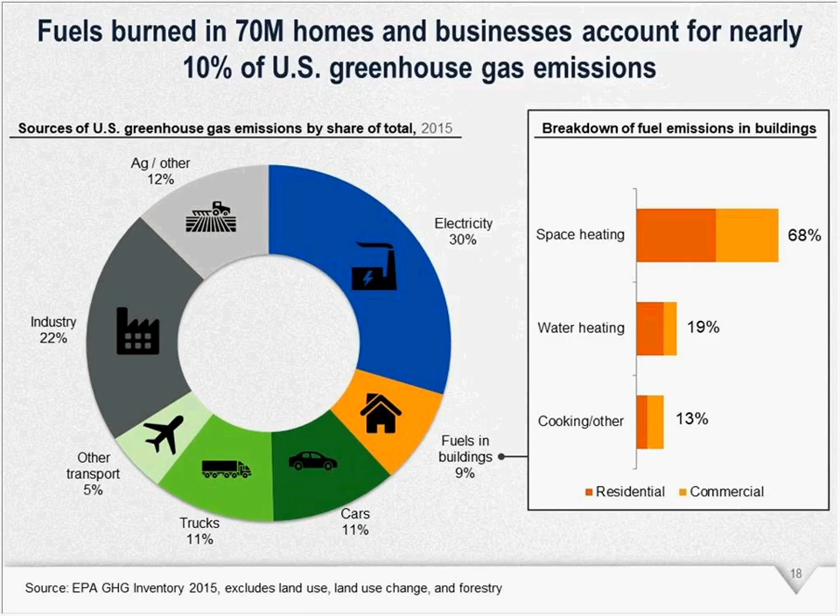So we wanted to investigate this hypothesis: that efficient buildings could power all of these end uses with low carbon electricity and eliminate fossil fuel use in buildings, along with the emissions and indoor air quality and safety issues that go with burning fuels in buildings. And secondly, that these end uses can be interactive with the electric grid and can balance wind and solar power, which are variable resources.

So we launched this report with the big question of how do we decarbonize buildings, and should we pursue this path? Should we, as a nation, states, or cities, be switching people and businesses from natural gas, oil, or propane to electricity? Does that actually make sense?

We had heard a couple of assertions that gas is always cheaper, or that it's better to burn gas at the point of use rather than burn it at a power plant and transmit it over the wires. So we wanted to investigate that.

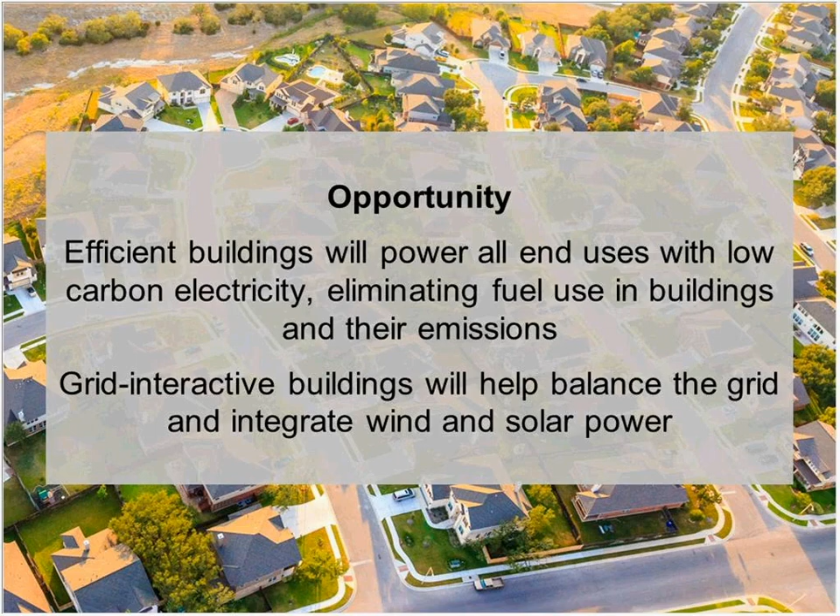So the scope of this report asks a couple main questions: does electrification reduce or increase carbon emissions today, with the grid we have, the electric system we have today? And does it reduce or increase long-term cost?

We'll talk about the mix of what we looked at in a moment, but it was limited to single-family homes with ducted heating and air conditioning. We did not include multifamily or commercial buildings, other heating systems without ducting, ground source heat pumps, or renewable gas.

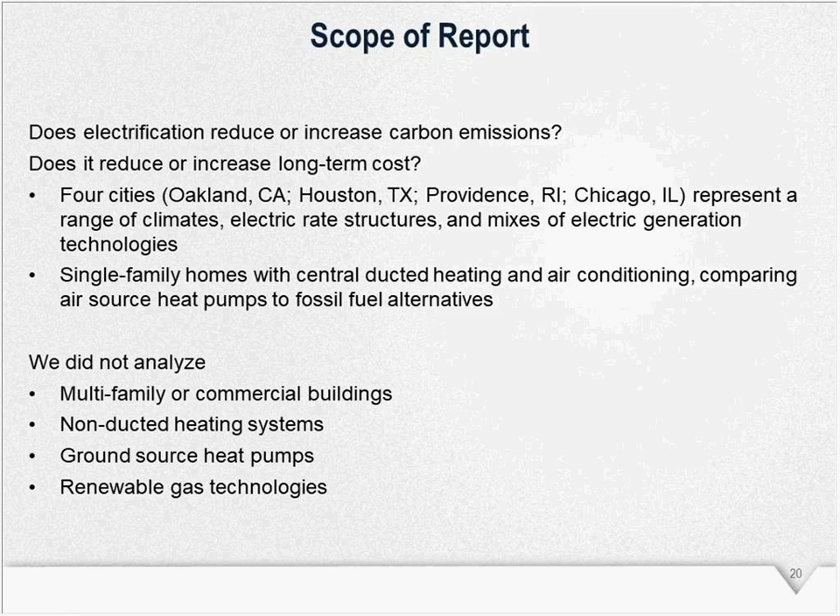But we did look across these variables: geography, 4 cities — Chicago, Oakland, Houston, and Providence. These were selected to give a mix of climate types, electricity pricing and gas pricing, and how customers are charged for those things.

We looked at new construction and retrofit. The new construction homes represent a much higher degree of efficiency than the retrofit homes, which would be more of an average or medium performing building.

We did investigate a variety of electricity rates and tried to identify creative tactics we could use to optimize for those rates. Can we preheat the water when electricity is cheap, for instance?

We considered whether a customer was replacing only a furnace, or whether they could get kind of a 2-for-1 benefit, where both their air conditioner and furnace were at end of life and would be replaced with one air source heat pump. And then we looked at a few different fuels: electricity, gas, propane, and oil.

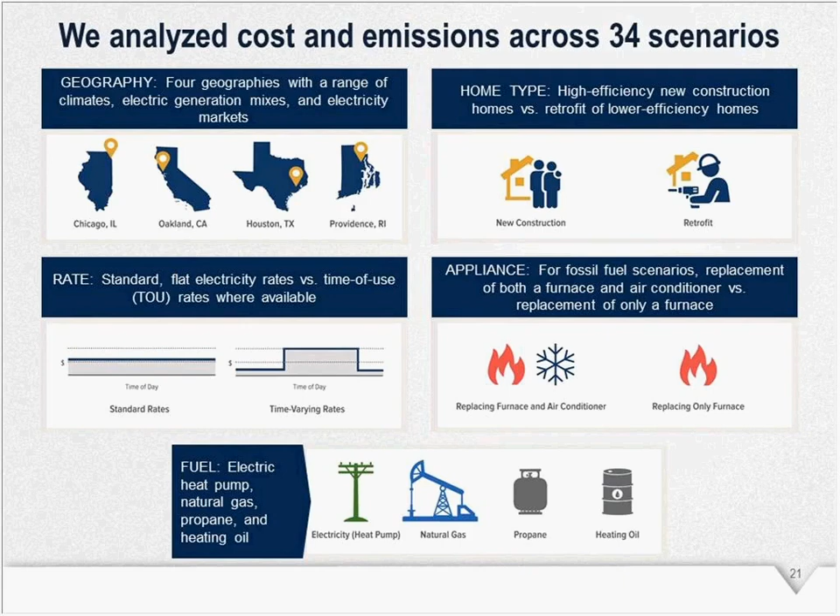So let's dive in a little more. Okay, last point on methodology — we did use EnergyPlus as our modeling software for the carbon emissions associated with electricity.

We used marginal emissions data on a 5-minute increment for the entire year in that city — what power plant is turning up or down just a little bit to accommodate more or less electricity. So it's very granular in terms of which power sources are actually responsible for meeting additional load. And we did use heat pumps that meet the cold climate certification.

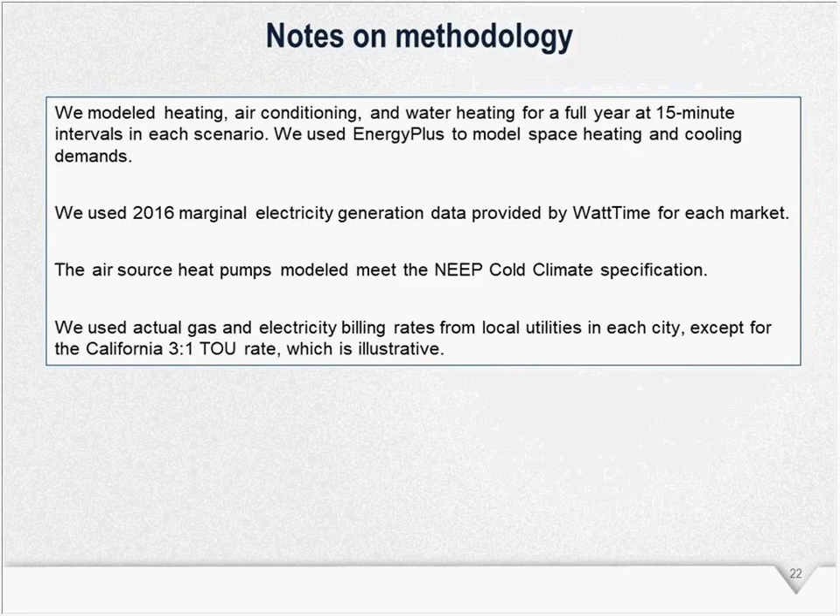I'm going to dive into the highlights here, and then we'll dive into some city-by-city results and talk about how the numbers shook out.

So the first point is: is it cost effective? We found kind of a mix, but we found the answer is yes in several situations. Pretty much all of the new construction situations came out as cost effective under our analysis.

There's a couple reasons for this. One is that you get a bit of a 2-for-1 benefit — you're installing one air source heat pump instead of both an air conditioner and a furnace. And you save a little bit on natural gas infrastructure in the building, and you could save a lot on avoiding the underground gas infrastructure that serves the home itself.

Also, the new construction buildings are much more efficient and are a better match for air source heat pumps, including in colder climates, than the less efficient buildings are.

The oil and propane scenarios we only looked at in New England, because we know oil in particular is common there, but it is relatively cost effective to electrify those customers under our analysis, considering they do not have gas service already, so natural gas is not an option for them.

Some of the existing natural gas customers are the hardest to convert from a cost point of view, because they're already served by natural gas. But if the air conditioner and furnace are both at end of life, they could swap them out at the same time for one air source heat pump and come out ahead. It becomes harder to do on a proactive basis if they wouldn't otherwise be replacing those devices. We'll get into the electricity rates next.

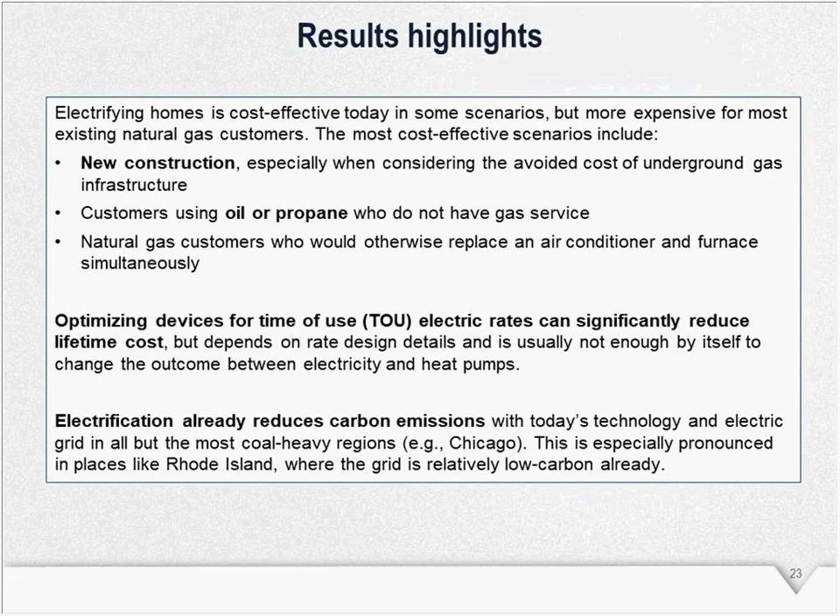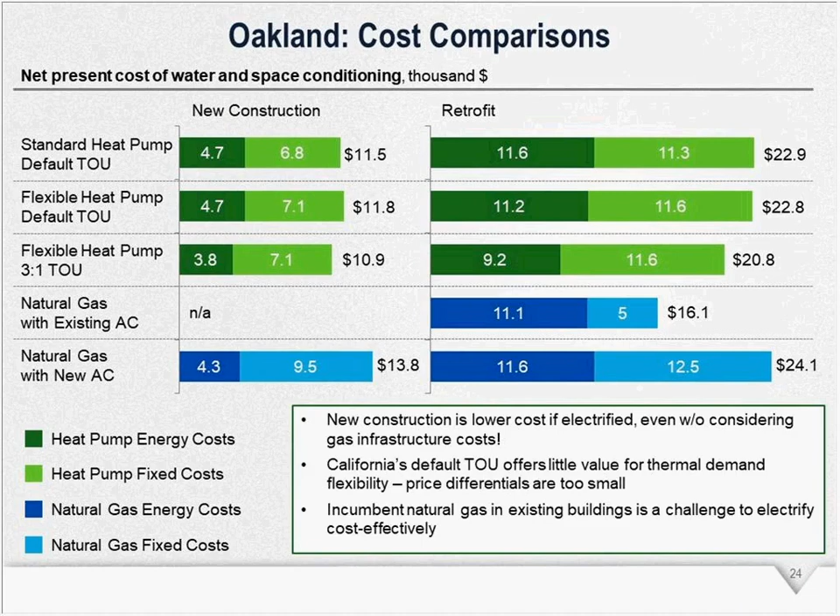All right, I'm going to move through. So the other side of the Oakland analysis was carbon, and saying: do we come out ahead or behind? Here we see the green bars are all shorter.

So the California electric grid is already relatively clean. Even if we use this marginal emissions methodology, a lot of times that marginal power plant is a natural gas power plant. But even so, even if you assume you're always burning natural gas to power the heat pump, you still come out ahead. A big part of the reason is just how heat pumps work, with a coefficient of performance of 2, 3, or even 4 in some conditions. Especially in a mild climate like Oakland, they're extremely efficient devices making very efficient use of that electricity. So you come out ahead in all cases here.

In a place like California, or other states with a high renewable standard already written into law, in California it'll be 100%. We know that over time, all new power plants constructed are going to have to be renewable, or at least zero carbon. So we know that by 2045, if the law stands, all these green bars will go to zero. That's really the promise of this approach.

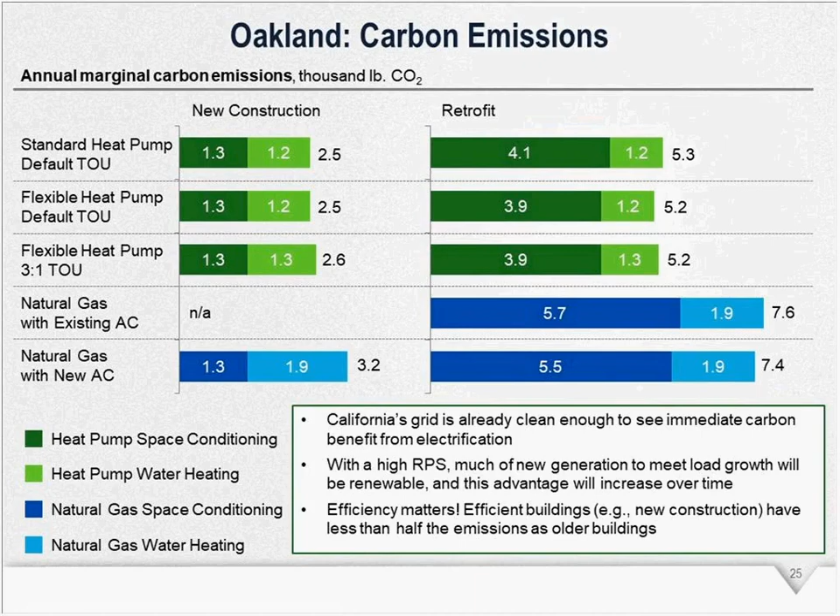Okay, so we're going to walk through a couple other scenarios and see what's the same or different when we look at different cities. This is Houston, and the main headlines are really similar. For new construction, the costs are still lower for the all-electric, green options. In the retrofit case, it's more mixed — the lowest cost is still a customer who just sticks with natural gas.

But we've tested out a couple other things here. On the electricity rate side, there's something unique offered in Texas. Texas has a retail electricity market where all customers can shop around for their electricity provider, and they offer all sorts of creative rate types. One of them is called 'free nights,' where literally as a customer you pay $0 for electricity between 9 p.m. and 6 a.m. every day of the year, and to compensate, you pay a more expensive price during the day.

So we said, could we take this to the extreme? What could we do with that free electricity? Could we maximize it, really severely pre-cool the house during the summer? Could we preheat the water all year round? Then at 6 a.m. when the price changes, you've got a cold house and a hot water tank, and see how long you can go through the day without using any more electricity.

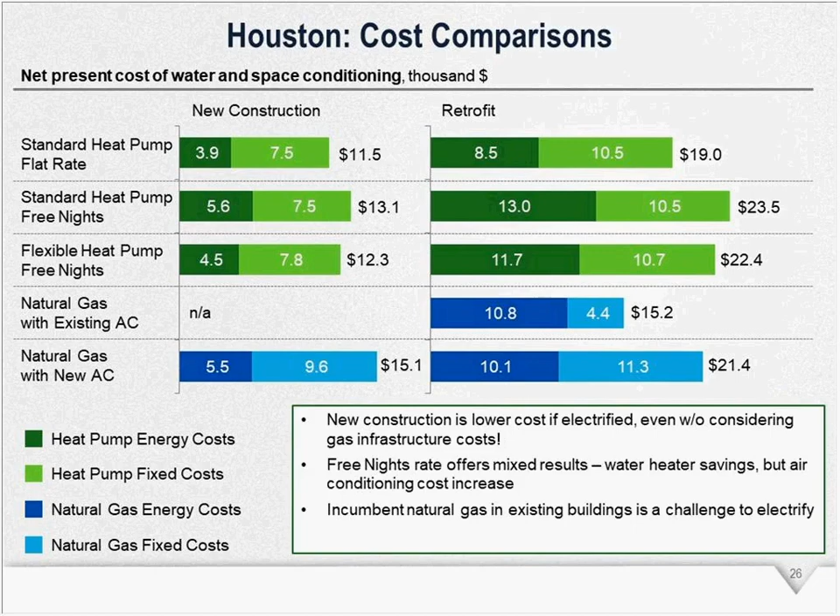Great. Well, to look at the flip side of Houston on the environmental side or the carbon emissions side, the Texas grid is a bit more mixed in generation sources than California's, but still natural gas is sort of the dominant generator on the margin. So this emissions analysis ends up being compared to burning natural gas for electricity. So it's somewhat similar to California. The green bars for the most part come out a bit ahead, not as big a benefit as California, but it is some reduction immediately,

even without more renewable generation. And even in Texas, which does not have a significant RPS the way that California does, we know that there's a trend towards more wind energy, starting to be a trend toward more solar, and a trend toward retiring coal. So we would anticipate that this would get better.

The exception would be this unique case with the flexible heat pump on the free nights rate. We described really aggressively trying to cool the home down at night or heat the water up. Because the electricity was free, our simulation really used a lot of electricity during those hours. And while it didn't cost the customer anything, it did have a larger emissions impact. So we found there's a bit of a perverse incentive there to overuse electricity in this middle case, the third bar, and that comes out to the detriment of the environmental impact. So in this case, we didn't recommend the free nights rate as an actual benefit for the customer.

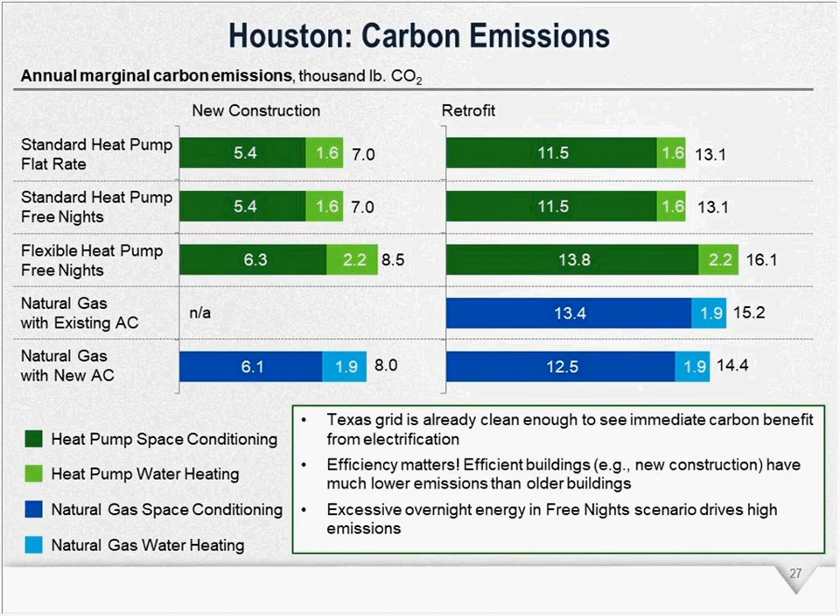Okay, so here we're going to take a little deviation into how the electricity is used through the course of a day under different scenarios. And one reason we care about this is because the impacts on the electric grid are going to be really important for the success or failure of the electrify everything movement, I would say.

So for instance, the naysayers might say that if we're just loading up electric demand at the wrong times of day, we're gonna overload local parts of the grid. We're gonna require new power plant construction. It's gonna be very expensive. So doing this effectively would require managing the timing of when electricity is used. And so we wanted to see how we can actually shift that electricity around.

Okay, so here's the Houston example I talked about. The top chart is just the standard. This is in January. It's not very cold in Houston, but there is a heating load. And you can see they're heating a lot in the early morning, in the red there, not as much in the middle of the day, and picking up more in the evening. The water heater usage is kind of random. For some reason, this customer profile is using some in the early morning.

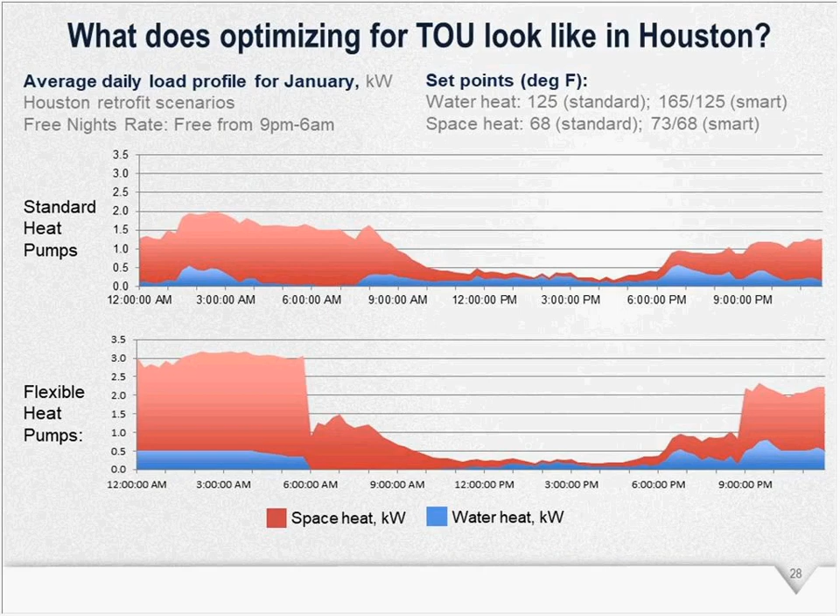And then to look through another example, so this is really the same thing, but during the cooling season. So this is in July. So first of all, you can see there's a lot more energy use because it's Houston in July, where we have a lot of air conditioning load.

But once again, if we really try to pre-cool the home, in this scenario in the chart here on the bottom, we pre-cooled it down to 70 up until 6 a.m. and then changed the set point to 75. And just that 5 degrees of pre-cooling gets you a little benefit for an hour or two maybe. But by the time it's really hot in the afternoon, there's no discernible impact.

So what we're saying here is that, at least with this particular rate, trying to pre-cool at 6 a.m. and then have that benefit linger and last in the home until the afternoon on a hot day in Houston, it just doesn't quite cut it.

Great. Okay, I see there's a couple other questions. Before I move on, let me see if we can address some of these questions. Okay, so the question here is about not recommending continuous HVAC versus using a thermostat that only runs at certain times in a passive house.

Well, I would clarify that this concept of running continuous HVAC during one period to preheat or pre-cool works pretty well for a water heater. I would absolutely recommend doing that with a water heater, because you see here we're getting a big benefit out of that.

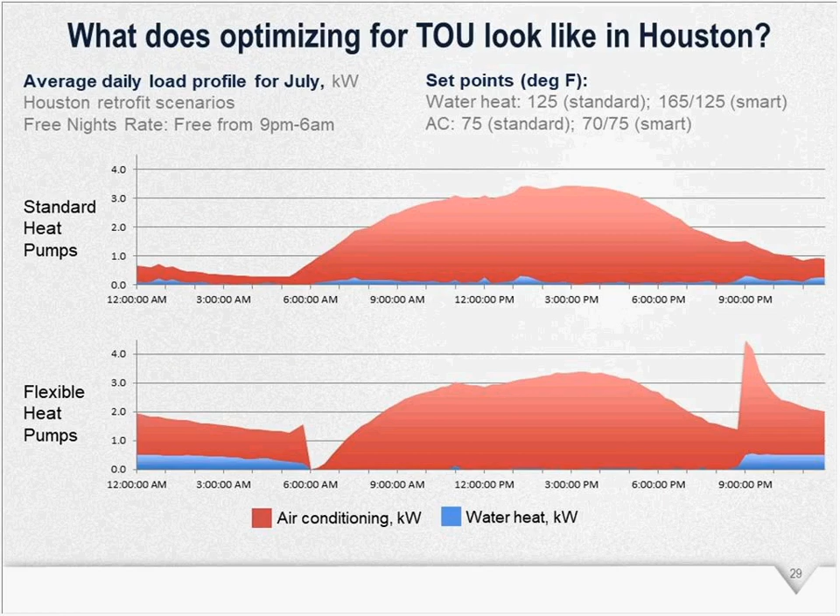So if we just flip forward one slide, we'll compare this to the efficient home, and we see everything just gets smaller. So this benefit between the top and bottom of deferring some energy usage for a few hours might be good in some limited situations, if there's really cheap energy followed by really expensive energy within a few hours of each other. But efficiency of the home is just much more valuable for the sake of reducing this energy impact.

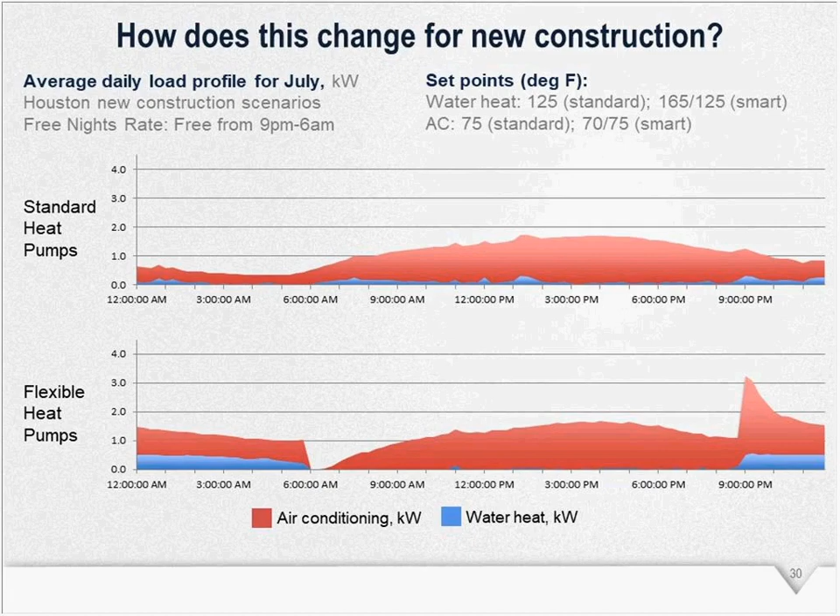Okay, we're going to move on and talk through the other cities and then a few implications. These are a bit similar, so I'll just focus on what's different. What's different in Providence, Rhode Island is that we considered a couple other fuels, heating oil and propane, and generally found that they're more expensive. They're certainly more expensive than natural gas. The propane pricing in New England is quite expensive, so that would be much less advantageous from a cost point of view.

Heating oil is slightly more expensive than the heat pump option, even in the somewhat colder climate that Rhode Island represents. So the energy cost associated with heating with oil or propane is just higher, and those customers are going to be more attractive targets for electrification than the natural gas customers.

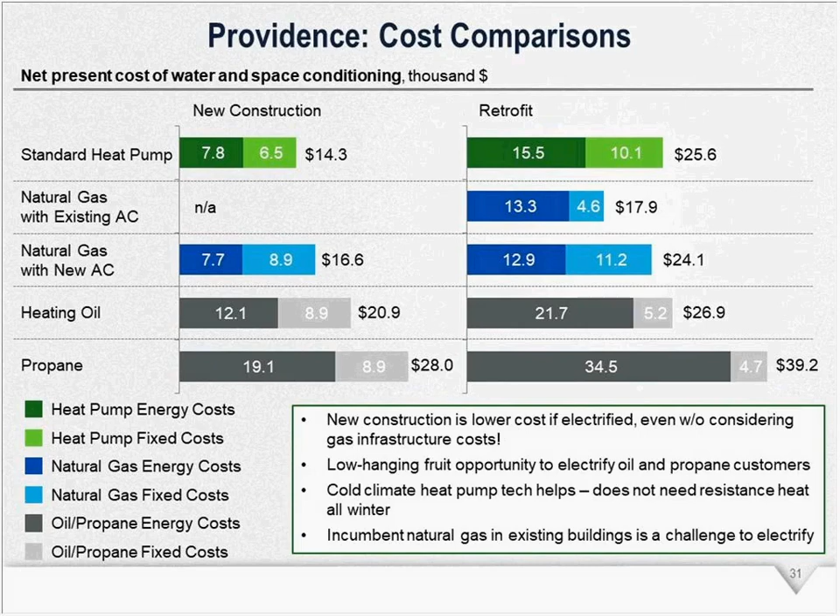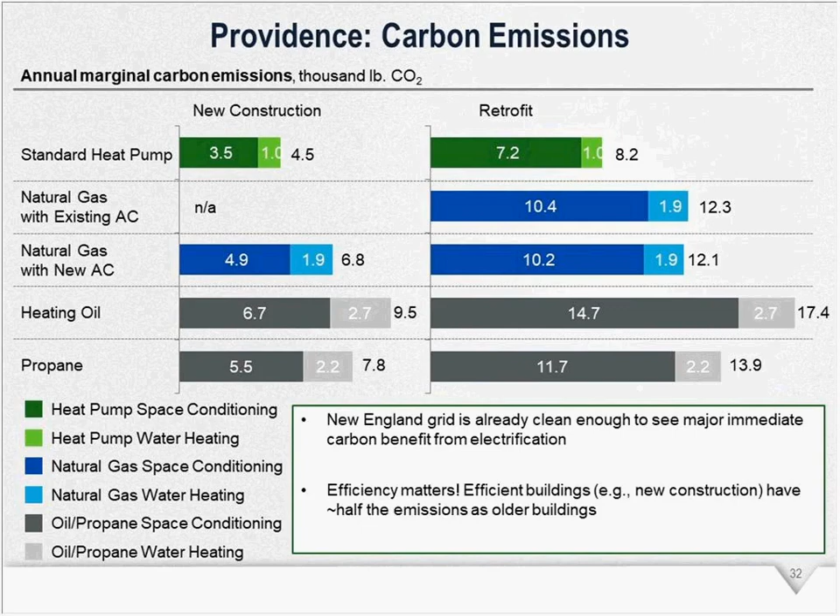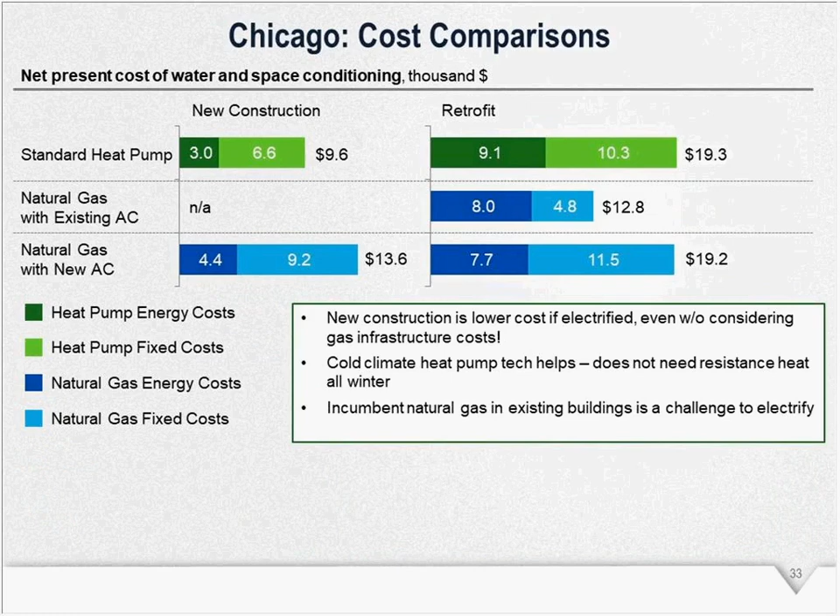And then lastly, we looked at Chicago. I think the cost numbers shake out pretty similar. New construction is beneficial, retrofit, not as much. But the other interesting thing about Chicago will be the emissions impact.

If we think about where power comes from in Chicago, it's a mix of coal and gas and wind in the region. But the analysis we used was just what's on the margin, and based on the data from the market operator, it actually shows that they're using coal on the margin a lot, meaning that they're actually balancing with coal. This was surprising. It wasn't what we expected, but it's what the system operator's data shows.

So if we use that data and assume that it's basically a coal-based impact for new electricity production, it comes out looking poor for carbon. Now, our expectation is that this is changing rapidly, and coal plants are retiring across the Midwest. The long-term view will actually be much better than this. But if we only took the short-term immediate impact view, it would look relatively poor from an emissions point of view for electrifying with a heat pump.